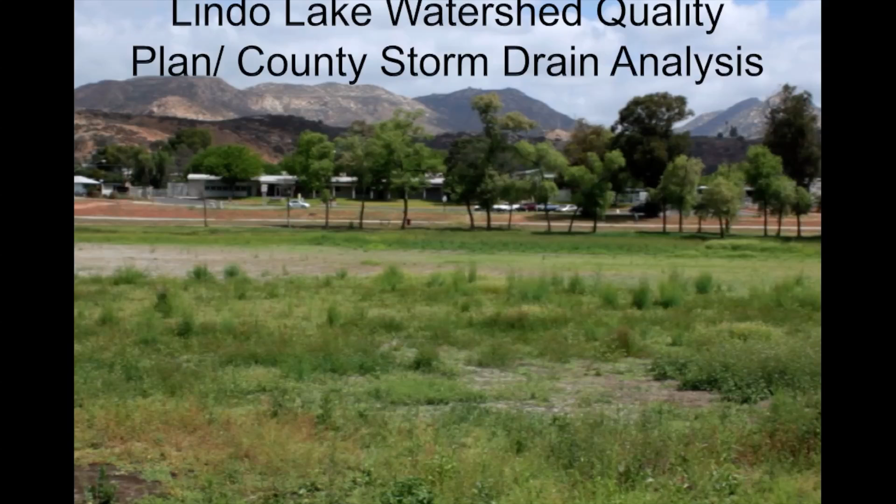The Enki engineering team was tasked with creating a watershed quality plan and storm drain analysis tool for the County of San Diego. The location for the watershed quality plan is the Lindo Lake watershed, located in the eastern portion of San Diego County. Lindo Lake is burdened with poor runoff management from surrounding neighborhoods at higher elevations. While the western section is fed with fresh water via pumps, the eastern section is provided water only from stormwater runoff and rainfall.

Because of the nature of water replenishment in this eastern section, and because it is the low point in the watershed, it has become a natural sediment basin for the area, accumulating years of soil and pollution. The watershed quality plan tasked to Enki Engineering will consist of a watershed management plan, including but not limited to analyzing existing stormwater systems that feed the eastern section of Lindo Lake, providing recommendations to improve these systems, creating programs to assist residents within the watershed boundaries to reduce runoff from properties, and recommending future systems to treat stormwater en route to the lake.

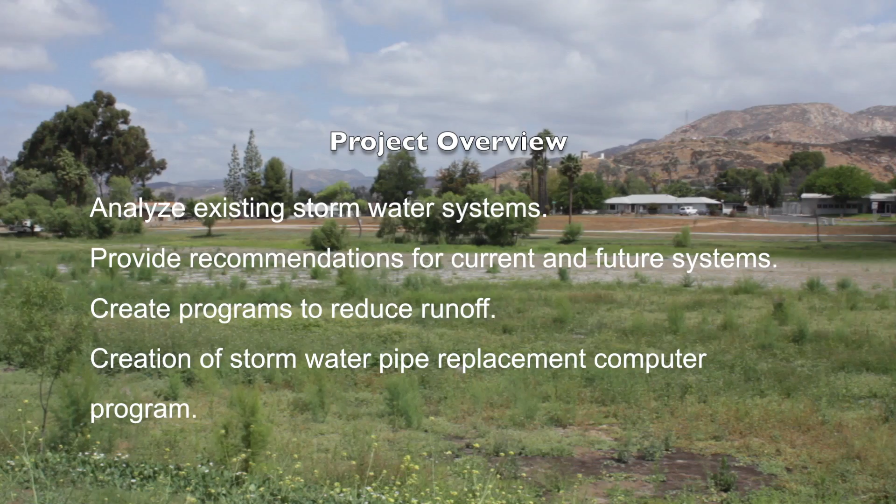Enki also created a cutting-edge computer program to assist the county in future planning of stormwater pipe replacement. This program is designed to allow the county to stretch their budgets concerning necessary pipe repairs or replacements further than they are currently able. To show the feasibility of this program, Enki will utilize it in a portion of the watershed management plan.

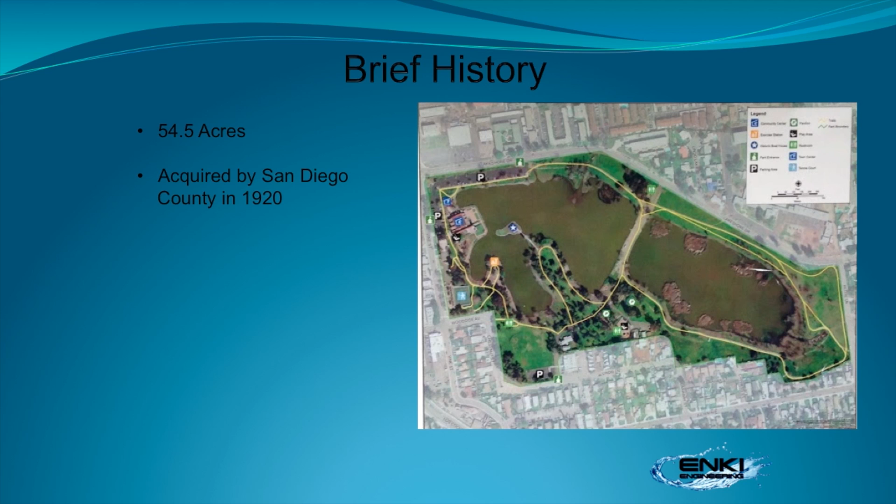Lindo Lake Park is a 54.5-acre public space with the eponymous lake at its center. The county acquired the park in 1920. Soon after, a dike was constructed through the lake, dividing it into two reservoirs. Due to percolation, evaporation, and the diversion of incoming water sources, both reservoirs could not be maintained.

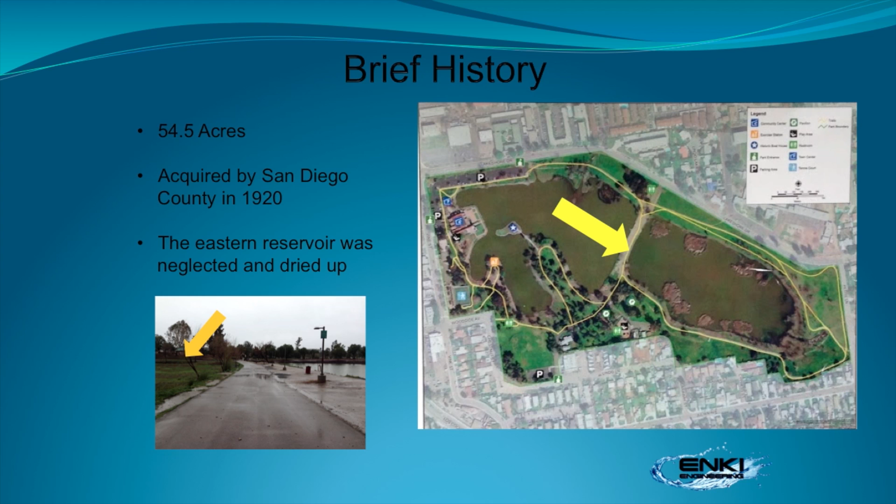Today, the western reservoir is periodically filled with purchased water. The eastern reservoir has dried up, only receiving waters from a stormwater outfall on the southeastern side that is amplified by heavy rainfall events.

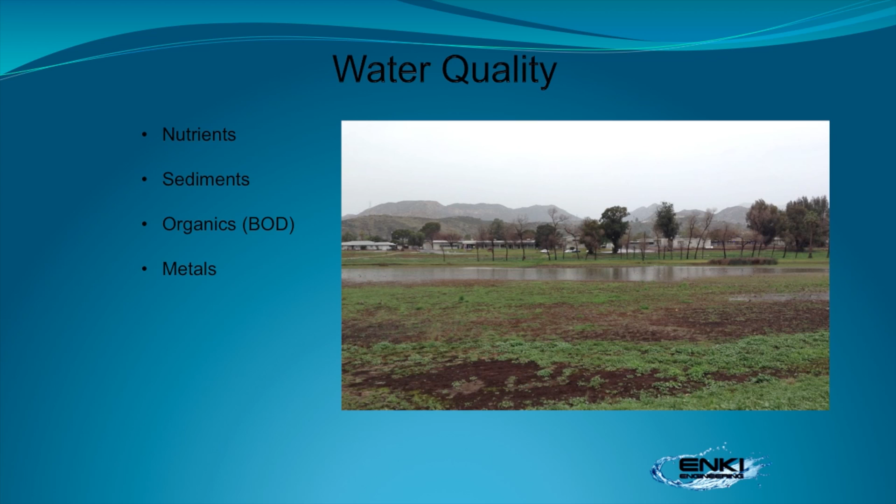The pollutants of concern at Lindo Lake include nutrients, sediments, organics, and metals. Water quality testing was performed for several of these contaminants. We collected water samples from both sides of the lake using a strict set of quality control guidelines.

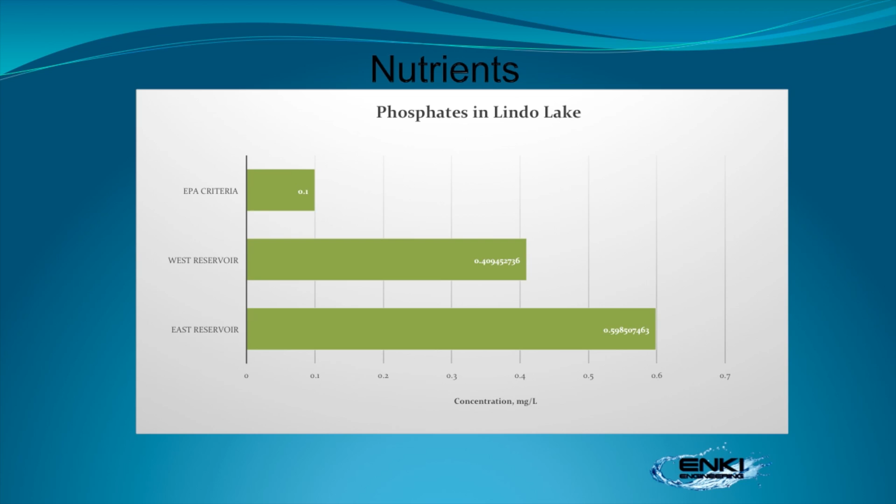We found that nitrates in both samples were well within the EPA criteria of 1 milligram per liter. The phosphates, on the other hand, were very high in both samples. These conditions could lead to eutrophication, which creates hypoxic waters that cannot sustain life. The high suspended solids content mostly consists of sediment and algae from excess nutrients.

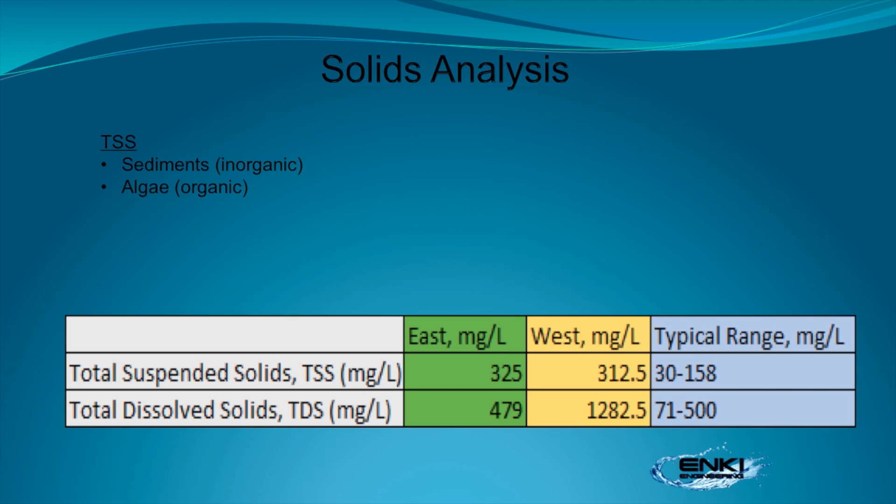It is worth noting that the western reservoir has more dissolved solids, which mostly consists of metal ions in surface waters. When this water percolates or evaporates, it leaves behind these contaminants. Many plants and animals live in the soil. No endangered species reside in the park, but many are still in danger due to contaminants from the surrounding watershed.

Enki Engineering is proposing to improve the water quality stormwater runoff in Lindo Lake. As sediments continue to be sent into the lake from streams and bank erosion, the lake has become shallower. The geotechnical report will discuss the soil and sediment in Lindo Lake.

The topmost layer is vegetation. The topsoil is described as mud, very loose, saturated, dark gray to black in color. There is little detectable organic odor, but another component of this mud may be waterfowl droppings. The thickness of this layer is between 1.5 and 3 feet.

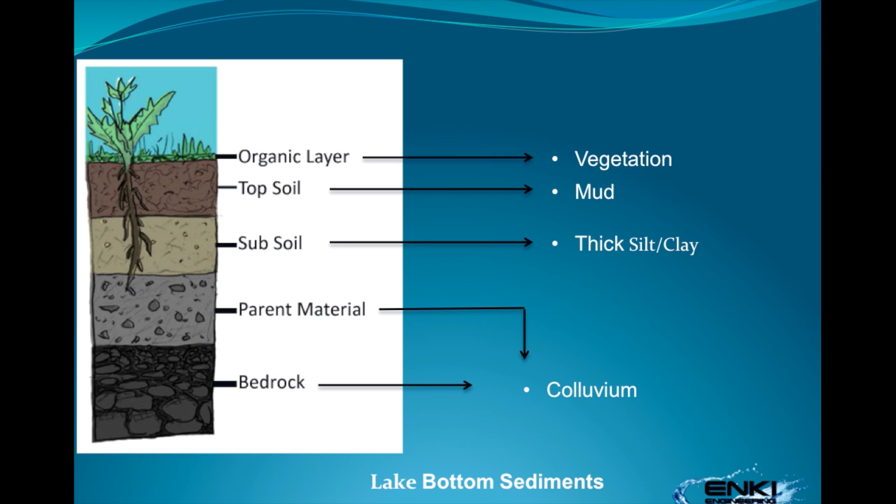The subsoil is thick silt or silt clay sediments, variable thickness and with some variability of texture. This layer can be generally characterized as soft, saturated, colored varying shades of gray. Underlying the lake sediments are colluvium soils from weathering of granitic materials and deposited by gravity into valley areas from surrounding hillsides. These are the boring locations where the soil was excavated from: B6, B7, B8, B9, and B10.

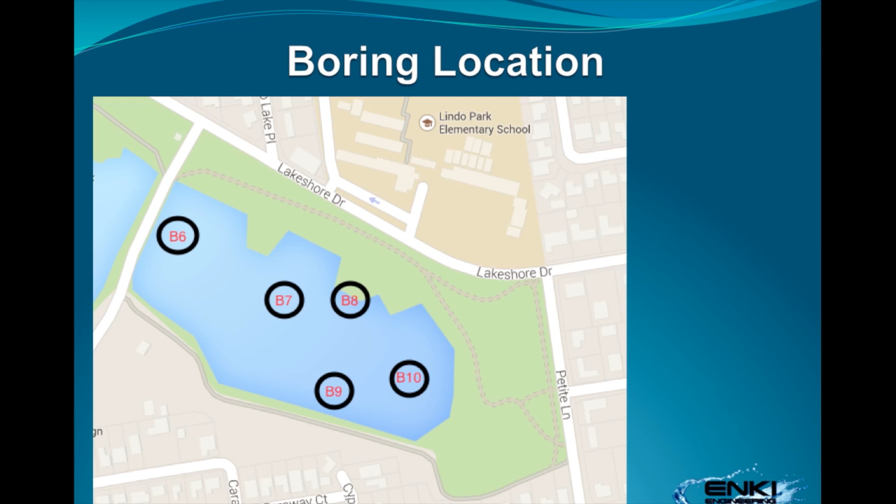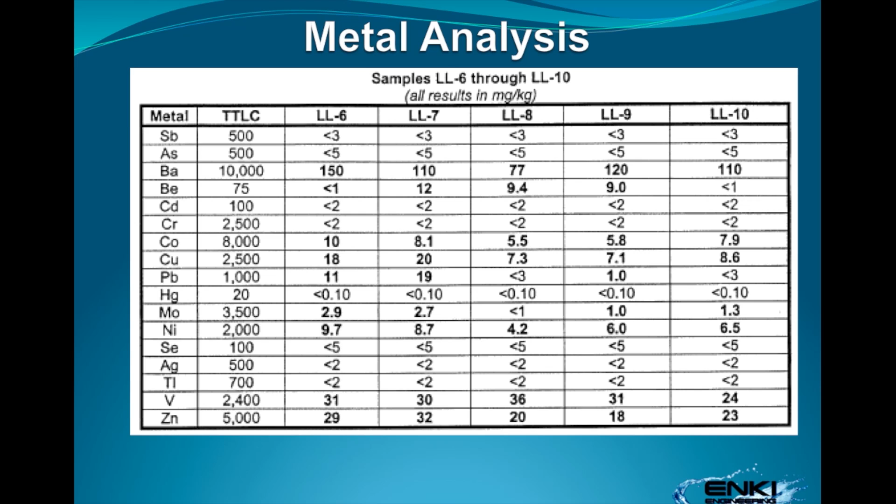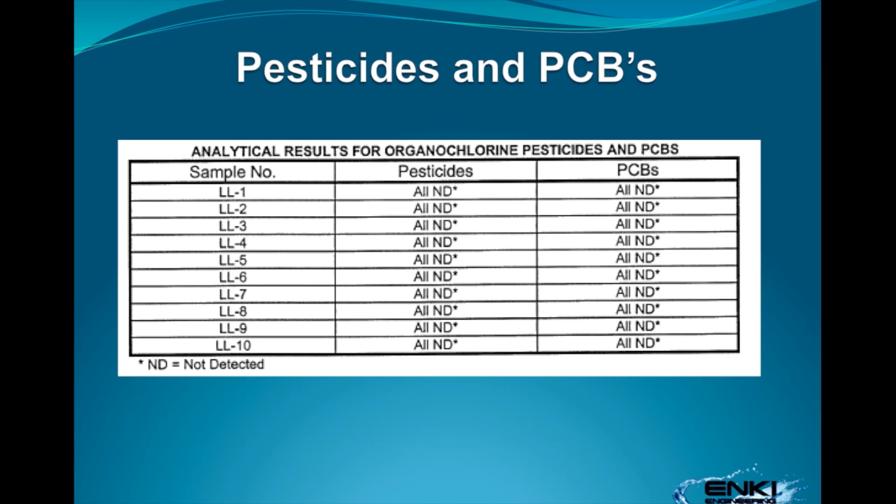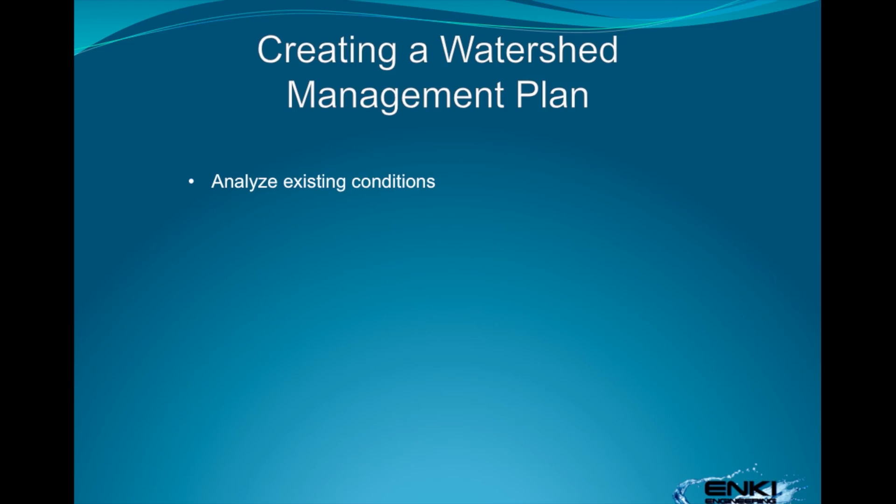In order to create a watershed management plan, we first needed to analyze the current conditions of the lake and its surrounding watershed. The conditions of the lake were photographed, and it was evident that a plan needed to be created that improves the water quality of the lake.

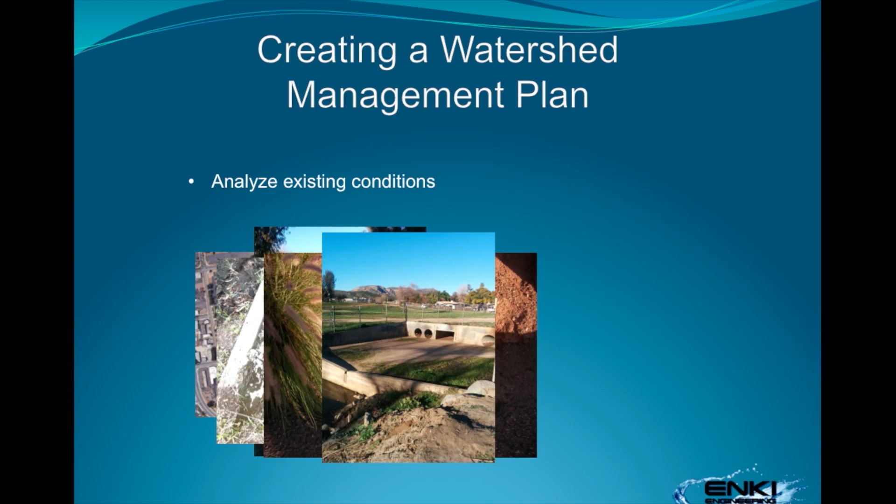Sediment was determined to be the prime pollutant of concern, therefore a sediment yield analysis was needed. A sediment yield analysis report was performed by Parsons Brinckerhoff in 2014 and was used as the basis for Enki Engineering's sediment yield analysis. The revised Universal Soil Loss Equation, or RUSLE equation, was utilized as the basis for the annual sediment accumulation within our watershed. Each of the parameters listed within the table shown were found in the Parsons Brinckerhoff report and the GIS maps they provided the county.

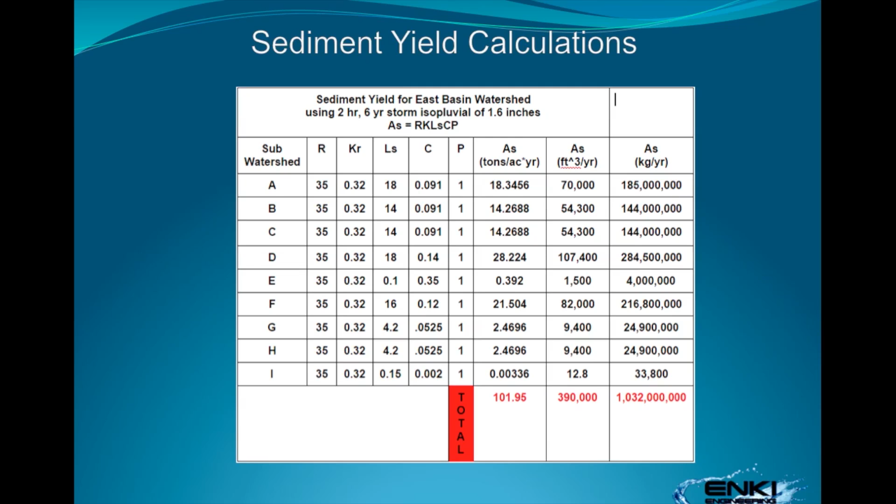The overall sediment totals were converted into kilograms and eventually into milligrams per liter in order to model it in specific software to retrieve sediment reduction estimates.

In order to improve water quality of Lindo Lake's East Basin, best management practices, or BMPs, will need to be utilized throughout the watershed. But first, a literature review of specific BMPs was needed.

This literature review was needed in order to understand which types of BMPs would reduce the sediment that accumulates into the lake most efficiently.

In order to model stormwater runoff and subsequent sediment accumulation, the Environmental Protection Agency's Stormwater Management Model, SWMM, was used. The SWMM model includes many parameters, including a subcatchment area with specific hydrologic parameters.

Hydrologic controls like inlets, conduits, and outlets, as well as initial pollutant levels and LID controls, or BMPs, are included. These will mitigate the pollutant levels, in our case, sediment.

The results of our SWMM model show that using the 5 LID controls shown, a maximum reduction of 78.46% of sediment can be achieved in the Lindo Lake East Basin watershed.

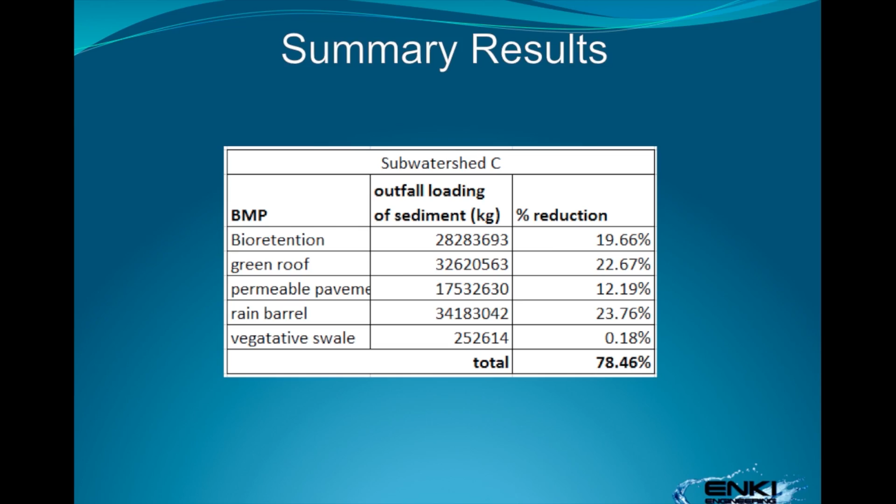Welcome to SD-RAIN. SD-RAIN is a tool specifically created to meet the needs of San Diego County. It was created to assist the county in their storm drain rehabilitation program.

It was created by studying storm drain pipe materials, and it functions as a design aid through storm drain analysis. It works by asking questions that, when answered, will eliminate options and warn the user of applicable requirements to note from the San Diego County Hydraulic Design Manual.

Now, a sample run of the SD-RAIN program will be conducted. The user will answer the input column, and in doing so, the program will classify the pipe material as either OK, No, or See Manufacturer, SM.

See Manufacturer is returned when a pipe material is not completely eliminated and different manufactured pipes may be able to be used. Warnings referencing the San Diego County Hydraulic Design Manual will also appear when necessary.

The final output is a list of the pipes that will not work, will work, or need more research. There is also estimated pipe diameter, estimated price, and estimated life expectancy.

SD-RAIN was created specifically with the user in mind. The program is soft-coded in that the reference pipe properties can be easily changed if chosen manufacturers offer pipes with different capabilities, prices, and properties.

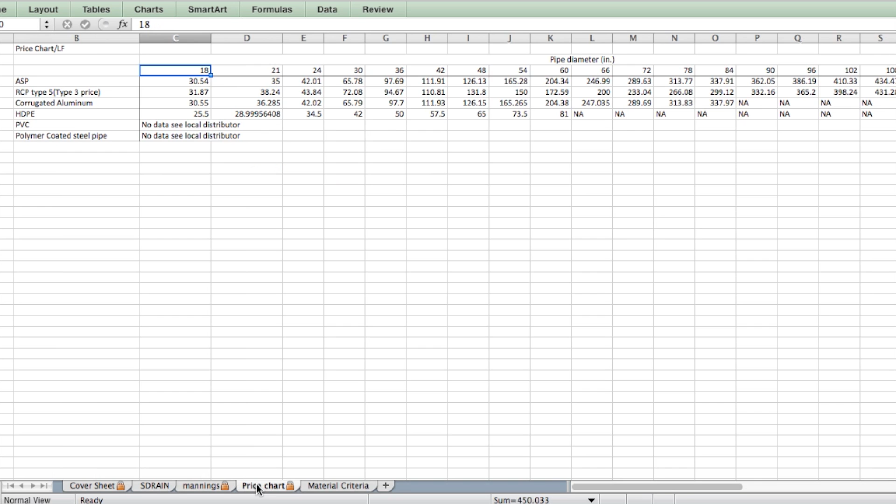Enki Engineering recommends the user familiarize themselves with the user manual and the methodology report before using the program.

Enki Engineering and San Diego State University assume no liability for failed design or misinformed decisions through the use of this tool. The information in this tool is correct to the best of our knowledge.

Remember, this is a tool and not a replacement for functioning knowledge of the subject matter.

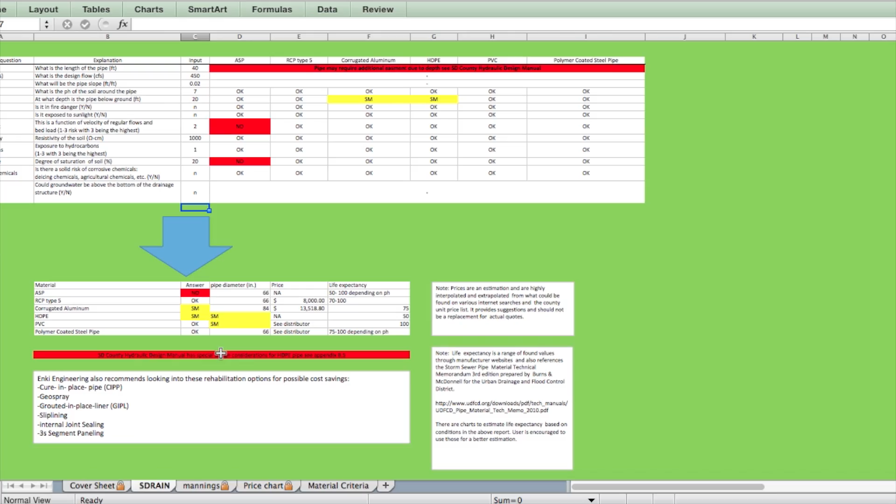The BMP chosen for the prevention of sediment accumulation and ultimate rehabilitation of Lindo Lake is the creation of a vegetated swale on the northeast side of the lake.

The vegetated swale design will start on the north side of Lakeshore Drive with the 50-foot pipe that crosses underneath and connects into the lake.

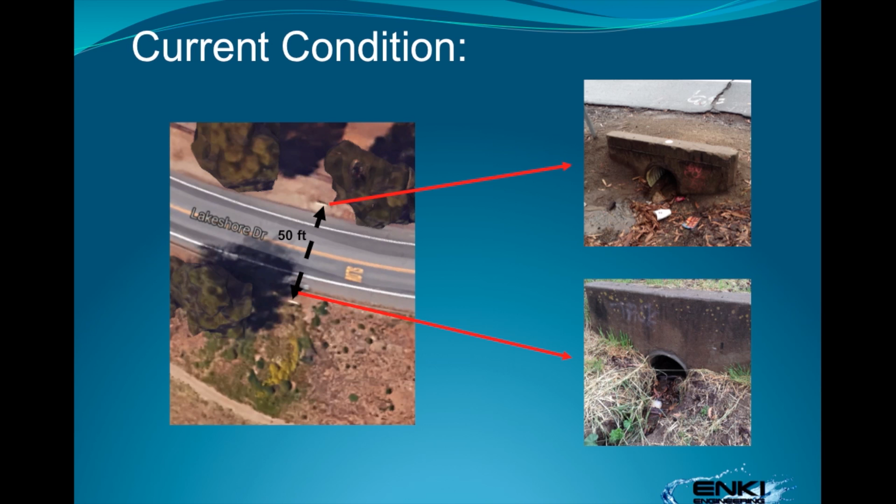The current conditions for both the entrance and exit of the pipe present a lot of sediment, vegetation, and trash accumulated, preventing the smooth flow of water into the lake.

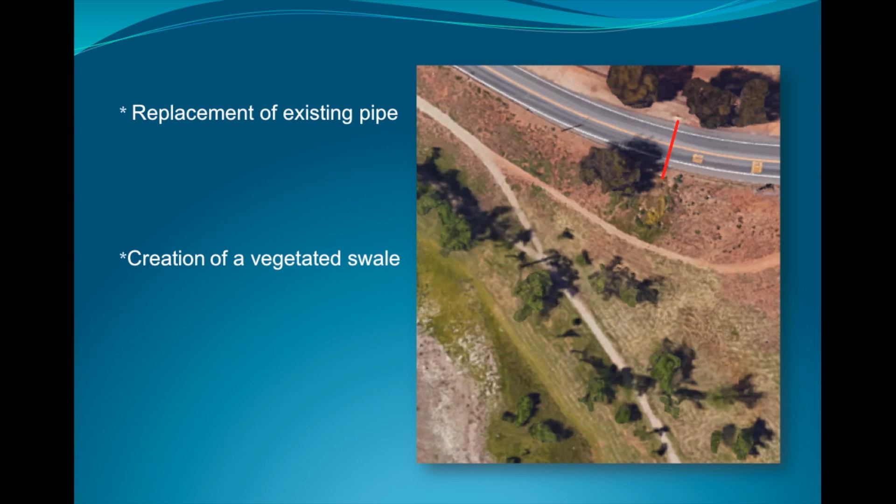Our design consists of the replacement of the existing pipe using the SD-RAIN program created by Enki Engineering, the placement of 250 feet of vegetated swale, and the addition of 2 bridges where the vegetated swale and the paths intersect.

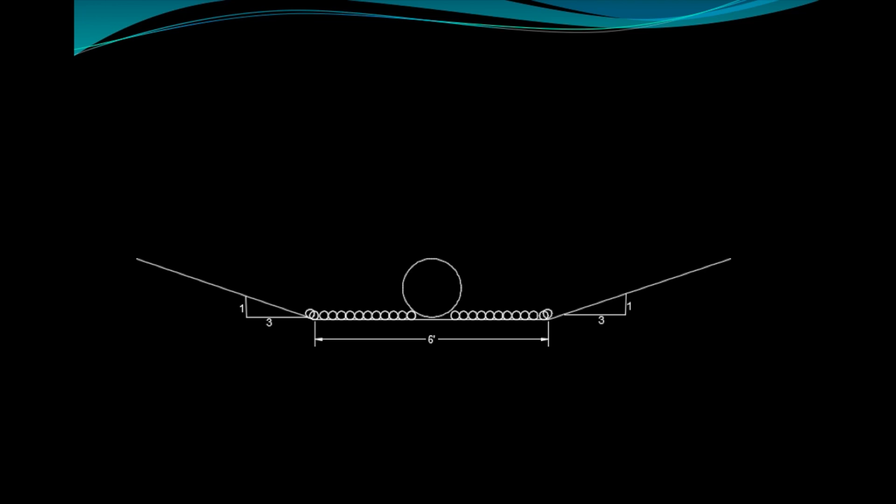The maximum flow calculated for this location is 12 cubic feet per second, which will require an 18-inch pipe.

Based on standards, the width of the swale should be 4 times the pipe size, with 8-inch energy dissipators and a side-slope ratio of 3:1.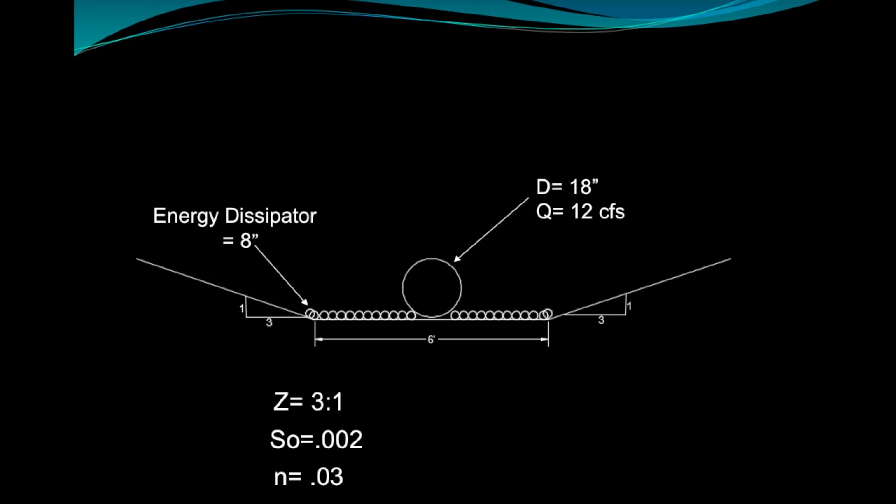The bottom slope chosen for maximum optimization is 0.2%, and with the 0.03 Manning's number known for grass, the normal depth that will be experienced during maximum flow is 1 foot.

With the design of the vegetated swale, Enki decided that this location would also serve as an ideal spot for the replacement of the existing stormwater pipe, because the construction can happen simultaneously.

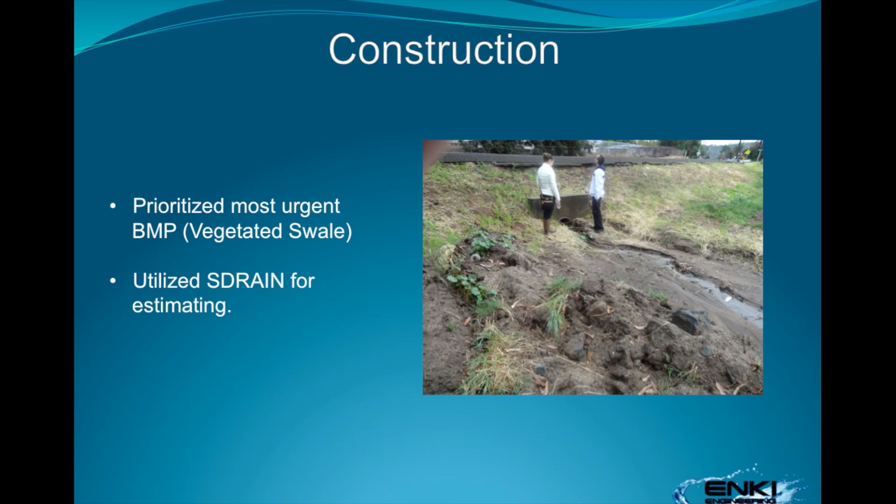This also presented an opportunity to utilize the new stormwater pipe program.

In estimating construction costs, we utilized 2014 Caltrans equipment rates and adhered to prevailing wage rates for our labor. Enki will ensure that all equipment is on site and ready to go on day one of construction to ensure an expedited process, saving both Enki and the county money.

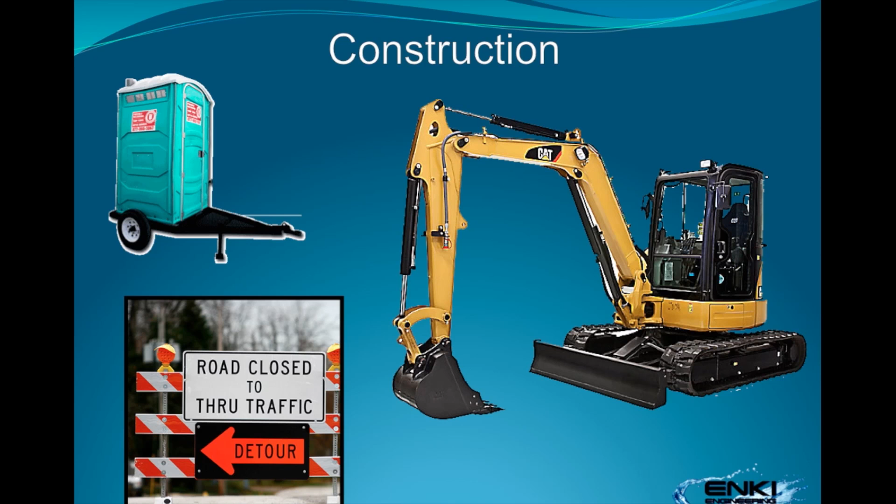A traffic control plan will also be implemented to ensure safety for residents during the pipe replacement process.

The final estimated construction cost for the combined stormwater pipe replacement and vegetated swale stands at $46,573.69. All subcontractors and materials will be locally provided.

Enki's SDRAIN program, for the first time, provided a real-world estimate of the cost of the RCP pipe that will be installed, and this was used in the final estimate.

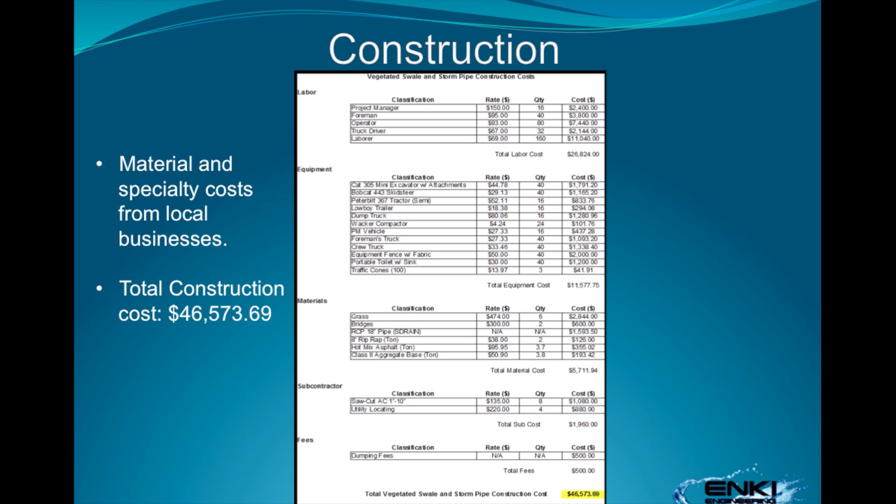As a final note, a cost-saving measure comes from the soil, which once dry becomes suitable for sale or reuse and does not need to be disposed of in a landfill.